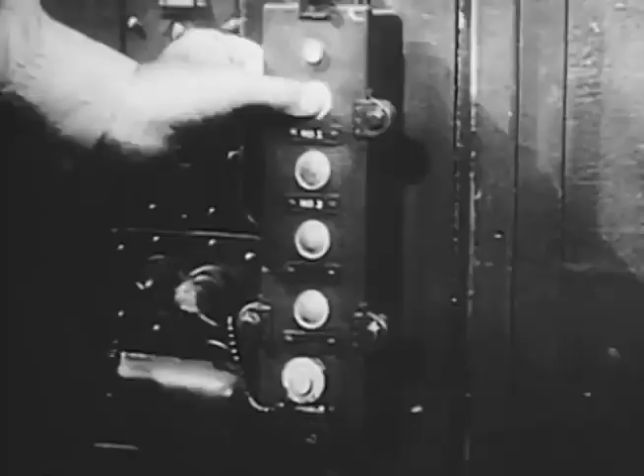Once you had a way to find it, the best bet was to engage the submarine at long range. But guns were only good on the surface, and long-range torpedoes were big, heavy, and not very reliable.

Rockets could get depth bombs out away from the ship. And retro rockets could go after whatever you hunted up with your MAD gear.

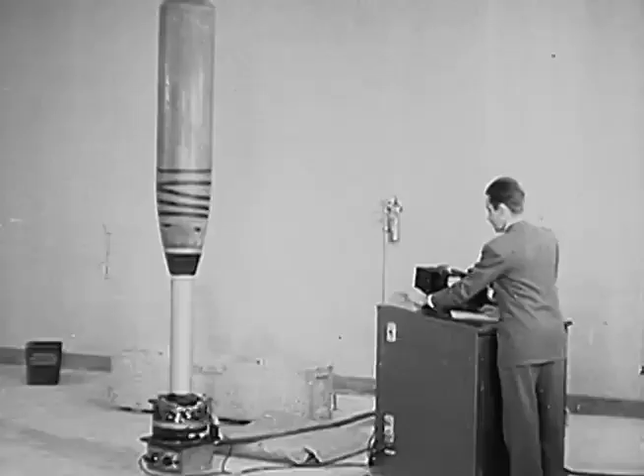The wartime rocket R&D effort that spawned NOTS China Lake wasn't the only secret weapon program being run by Caltech. Right in the middle of Pasadena, and in several spots in the surrounding countryside, Caltech pursued new torpedoes for the Navy, anti-submarine rockets, and everything to go with them.

As the war wound down, and post-war planning pointed toward maintaining a complete West Coast Ordnance R&D establishment, NOTS became a two-site activity, with rockets and air weapons centered at China Lake, and underwater ordnance at the Pasadena Annex, NOTS PA.

Pasadena had Green Street and the Foothill Plant, Morris Dam facilities, and the Eaton Canyon activities that had spawned the China Lake Pilot Plant.

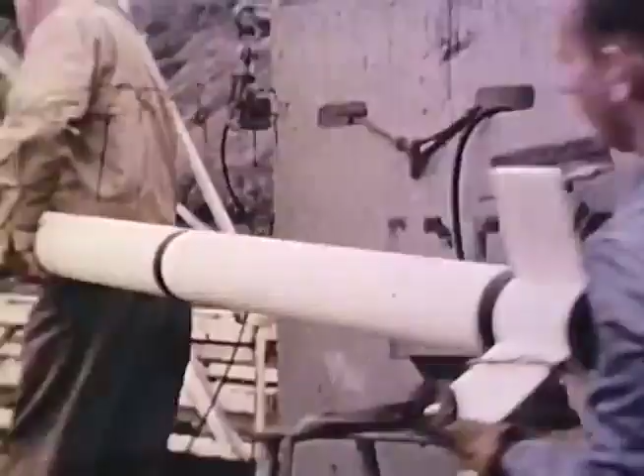Some wartime facilities were closed or returned to civilian use, but NOTS Pasadena would fast grow to include specialized T&E and support facilities at San Clemente Island, San Nicolas Island, and Long Beach, along with strange ranges and strange boats and barges.

For many years known also as P-80, NOTS Pasadena was a unique, complete RDT&E activity in its own right. PA pioneered system simulation and integration, silent, slick torpedo designs, and underwater T&E technologies.

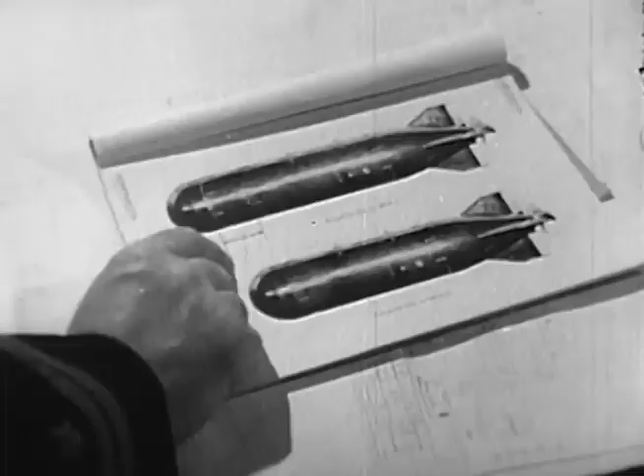Combining NOTS PA's underwater ordnance expertise with the air and surface weapon mastery of the High Desert Rocketeers made for the Navy's premier all-weapon RDT&E activity, with deep sea and arid desert ranges adapted to support the cutting edge of anti-submarine warfare endeavor.

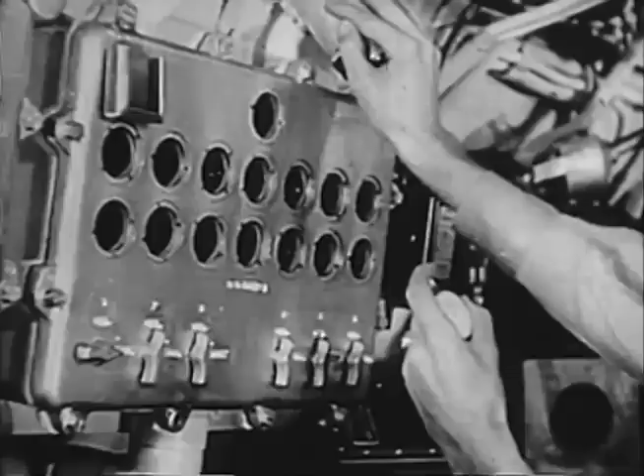As the submarine's offensive potential evolved, anti-submarine warfare, detection and destruction gained ever-increasing priority. And as the direst threat of the lurking submarine evolved from the interdiction of essential supplies to the incineration of entire cities,

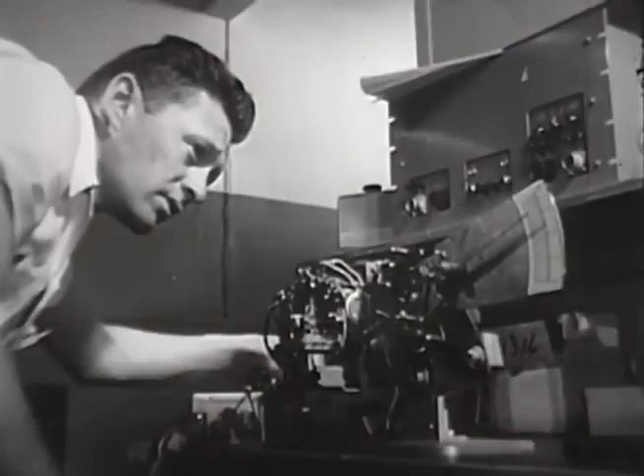anti-submarine warfare gained a prominent place in the Cold War and a high priority in the station's efforts to protect the fleet and the nation.

NOTS concentrated on the lightweight, multi-purpose torpedoes that could be launched from small ships or air-delivered, or rocket-launched to engage an enemy sub well outside its own weapons range.

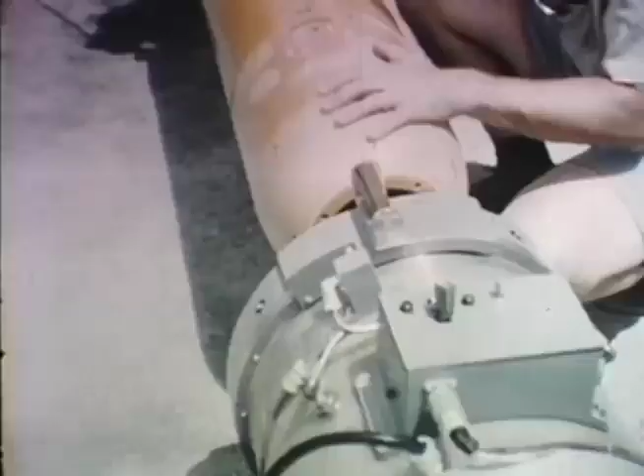Centered at Pasadena, the station's torpedo development program produced the EX-2A, predecessor of the Mark 44, and the surface-launched active acoustic Mark 32.

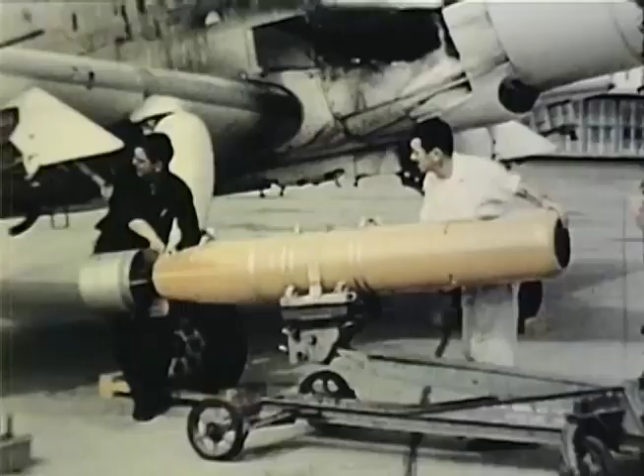NOTS contributed to the Mark 41 and 43 torpedoes, small active acoustic weapons with air and rocket launch capabilities, and to the Mark 44 and Mark 46 systems, advanced medium-range acoustic weapons deliverable from almost any platform, including rockets, helos, and drones.

Along with simulation and survivability studies of the long-range, wire-guided, nuclear-tipped ASTOR.

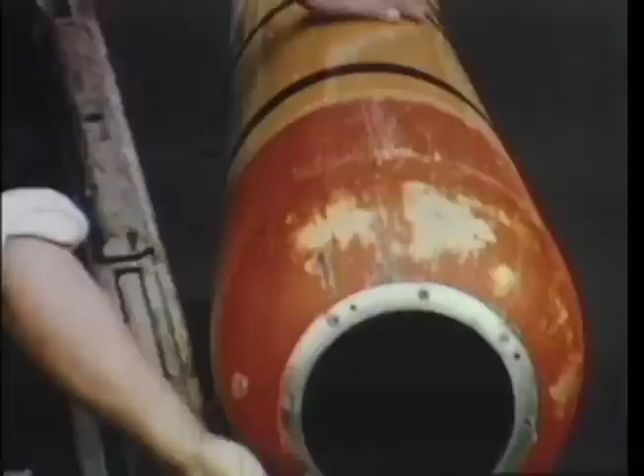With RETORC, NOTS advanced the technology of torpedoes, made them slicker and faster using swish, and made them quieter and more accurate with revel.

NOTS also developed REFIC, a simplified advanced ASW fire control system, and supported Dash, the drone anti-submarine helicopter that entered service in 1963 and returned to China Lake in the 80s as a missile target.

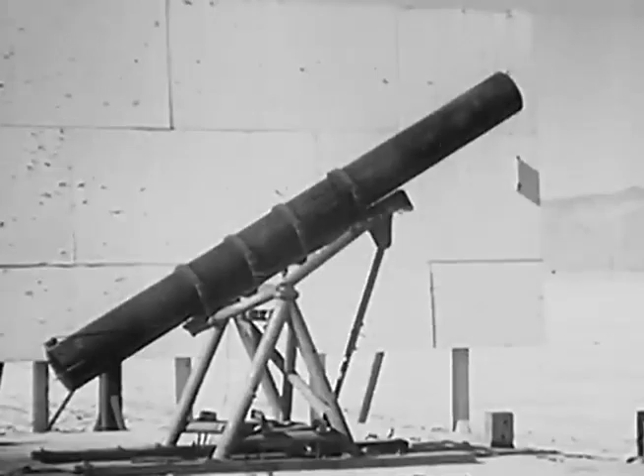By the late 1940s, the station's increasingly sophisticated rocket-fired sub-smashers had outpaced the wartime Hedgehogs and flying milk bottles.

From a new rocket motor and a high-tech fiberglass-cased depth bomb, NOTS made Weapon Able, with its oddly familiar trainable launcher. More advanced was the rocket-assisted torpedo, the Rat, with tag-on launch rails adaptable to most any destroyer.

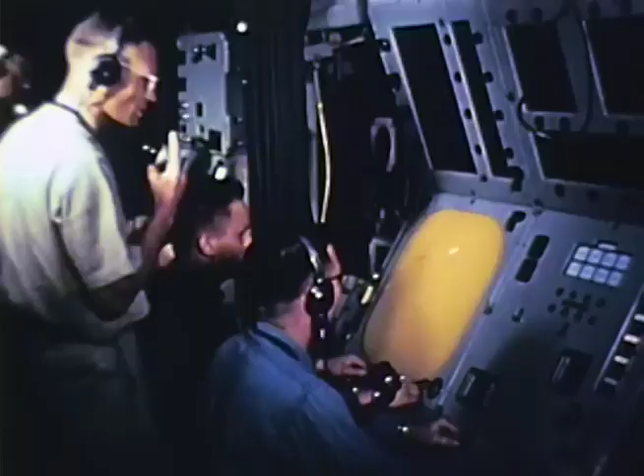Rat quickly gave way to the more sophisticated ASROC, short for anti-submarine rocket. ASROC, with an advanced fire control system, hit the fleet in 1961 in its familiar box launcher, carrying a Mark 44 torpedo.

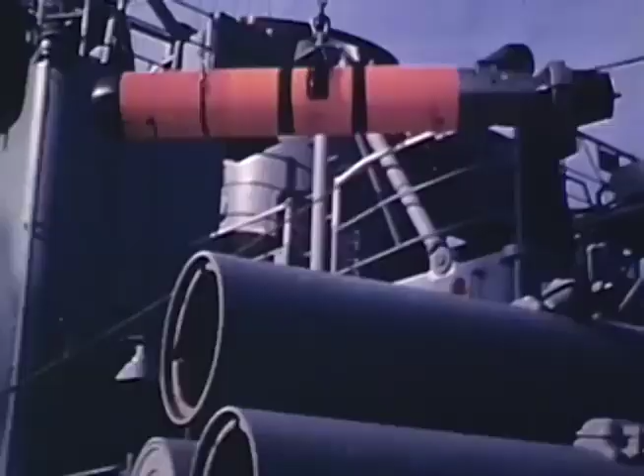Demands for more capability and better range led NOTS to launch ASROC from Terrier rails, upgrade to a Mark 46 torpedo, add a nuclear depth bomb option, and pursue LASROC and ERA, and eventually VLASROC, the vertical launch ASROC. VLA allows for any-aspect launch from long distances to deliver an advanced torpedo.

Some other activities tried a more complicated approach to flying a torpedo, but it's ASROC that's still in the air 50 years on.

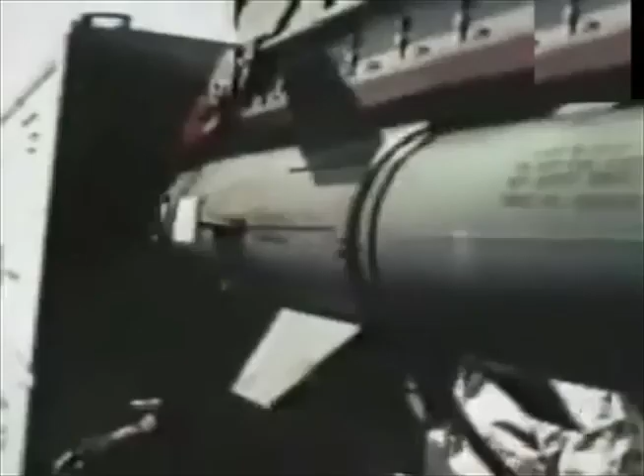Alongside rocket-launched torpedoes and depth bombs, the station pursued families of submarine-killing rockets, air and surface-launched, as well as sub-to-sub. The station participated in the nuclear ASW programs of the era as well, testing and integrating Lulu and Betty, and trainers for those. The sub-launched sub-killer Subroc, testing and improving it with track, air, surface, and subsurface launches. And the atomic option for ASROC, for when a single torpedo just wouldn't do.

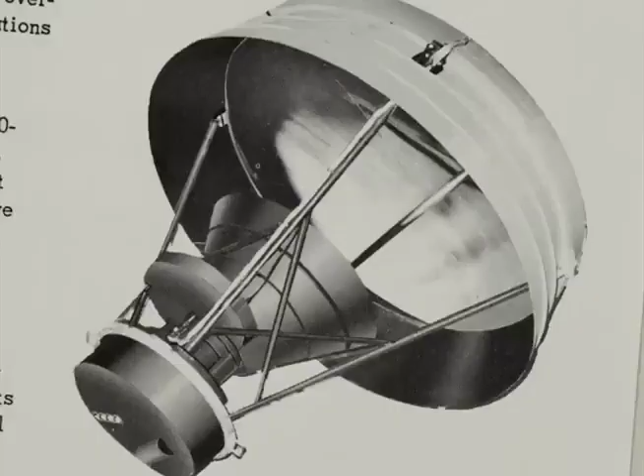RAT and ASROC and Weapon Able are practically common parlance compared to the lesser-known litany of NOTS ASW projects, from ACTAR and ANU and ASTOR, CLASP and Clinker, through DASH and Deep Dunk and Derry, FATUP, Fulham and Hydra, LOSS, PUFS, Moray, and to some extent Rocksight, Sailor Hat, SCAT, SeaHawk, SOSUS, Star, and Stone, not to mention Subad, Subic, Sus, and Swish, and at least one edgy project that evidently needed an Aztec to pronounce.

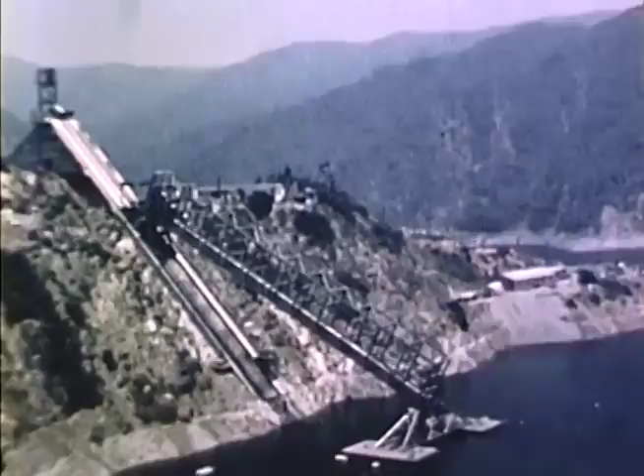There were facilities like VAT and VAL, and the Star Range. CURV, the robot claw machine, was related, although Pop-Up and Pea-Shooter and Fishhook and other Polaris facilities belonged to another episode.

More than the torpedoes, more than the rockets, the station contributed to some very secret aspects of some very public projects, and maintained an active program in fleet ASW data analysis.

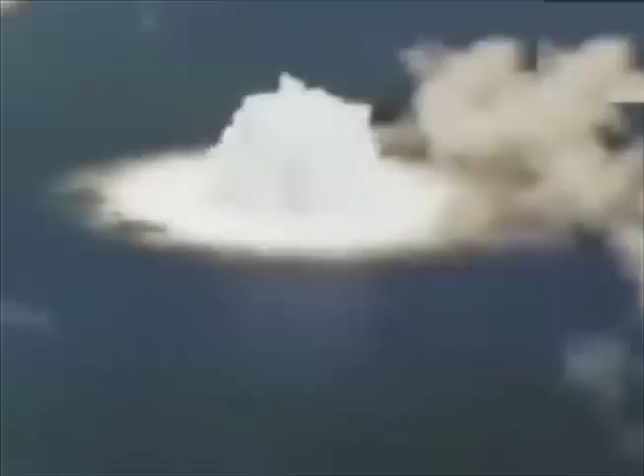China Lake and Pasadena worked on SeaHawk, the advanced ASW ship concept, and participated in the Hydra and Sailor Hat studies to determine the effects of nuclear detonations on ships and aircraft and ASW weapons.

And the station directed the development of SCAT, a hedgehog-delivered noisemaker designed to bell the cat, as it were.

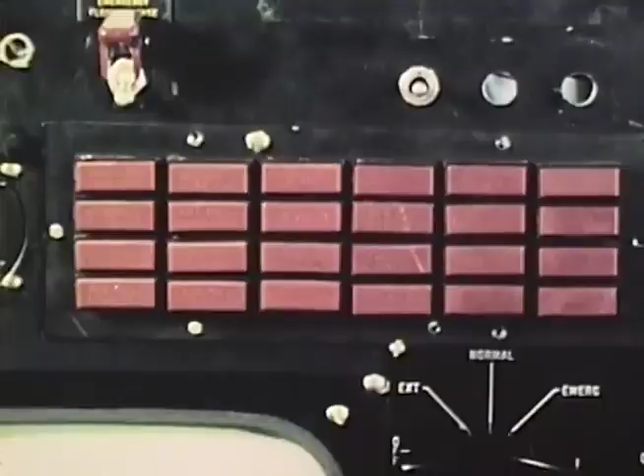China Lake's Moray mini-sub was conceived as a sub-hunting stealth fighter. Although it only saw research use, the concept was well demonstrated.

And NOTS studied the development of undersea facilities that might support sonar picket lines along foreign coasts and serve as bases for those mini-sub fighters.

The technology base for advancing ASW was given high priority too. NOTS scientists and their associates became experts in acoustics and signatures and surface effects and the ways echoes operate.

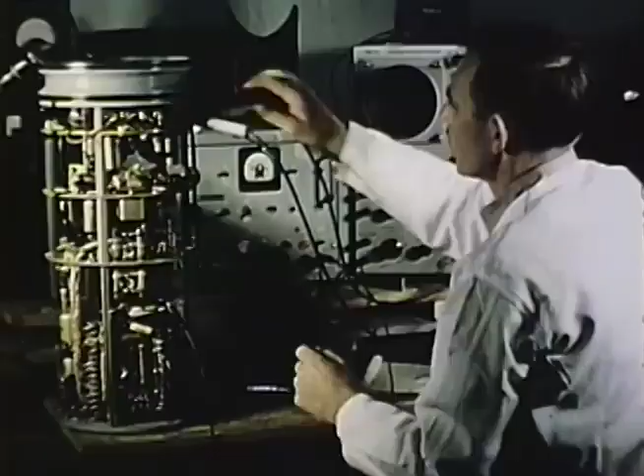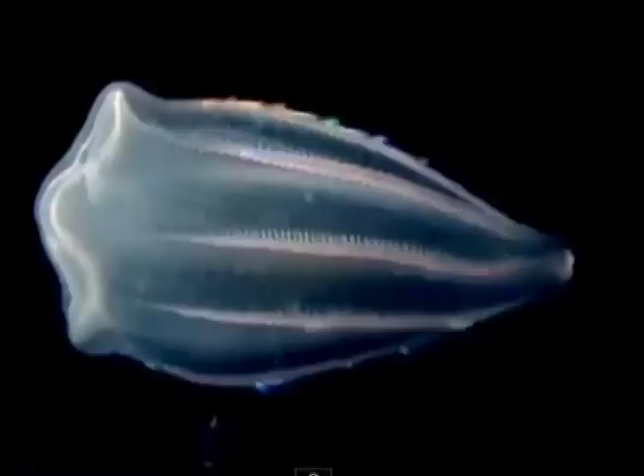They studied silent motors and boundary layer control and the slickness of fish, as well as the very composition of the ocean, and water mass and sound transmissivity and ocean currents and gravity anomalies, and even bioluminescence, to see if the tiny creatures that glow when they're disturbed might show up a sneaking submarine.

NOTS studied and applied submarine hydrodynamics, torpedo hydrodynamics, dolphin hydrodynamics, and magnetohydrodynamics. Yes, even Flipper had potential ASW application.

Although the station was split in 1967, with the Pasadena Annex and the ASW mission going to San Diego as part of what would become NOSC, NOTS had already written several chapters in the Manual of Anti-Submarine Warfare.

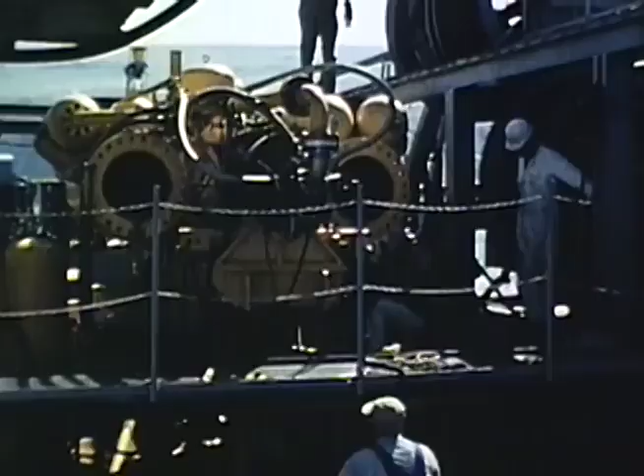And mission purification aside, China Lake would continue to support a variety of ASW systems, like Subroc-cum-Sea Lance, and vertical launch versions of some station standards.

With the end of the Cold War, the submarine would maintain a more subtle deterrent role and continue as a silent protector of the fleet, among other things.

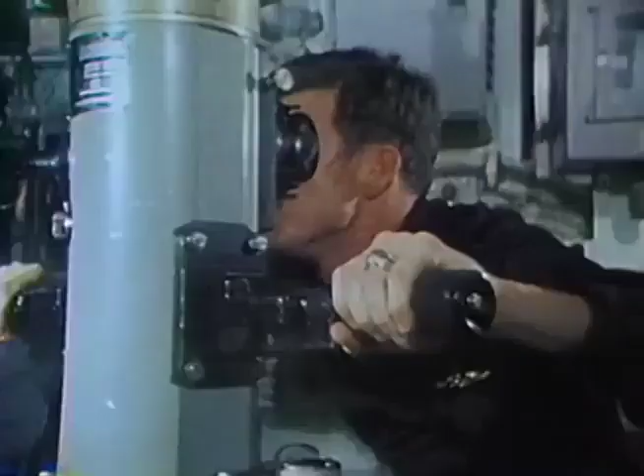But the post-Cold War world has also brought the possibility that even the more primitive of the so-called rogue states might be able to mount a shattering offensive. And in a world where even drug runners have adopted the cast-offs of the Cold War, ASW remains a top priority mission, and the silent, secretive submarine remains a potent player for defense, deception, diplomacy, and deterrence. But that's another story.

In the early years of World War II, Allied shipping suffered heavy losses. In 1942, these losses amounted to over 1,600 ships, almost 8 million tons. Most of these were victims of Axis submarines.

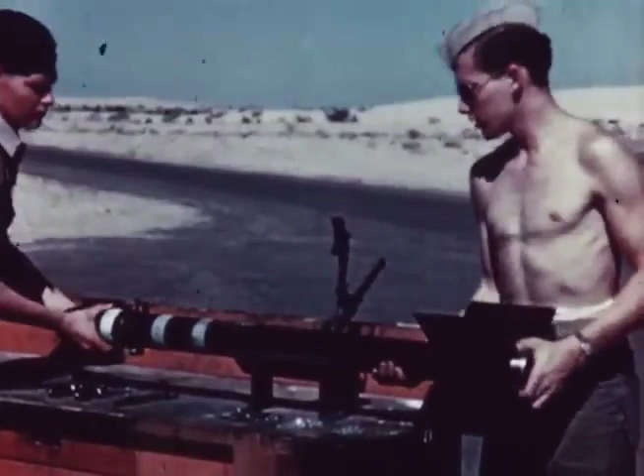One of the first employments of the 3.5-inch forward-firing rocket was aboard the small aircraft carrier Mission Bay in the latter part of 1943.

Lieutenant Habich, the aviation ordnance officer, reported: "The Germans got the picture pretty fast, that they couldn't stay up on the surface, because we didn't have to get so close as we did with the depth charge. It reversed the trend in submarine warfare and gave us an advantage." The rocket served admirably throughout the war as an effective anti-submarine weapon.

In 1943, in the upper Mojave Desert, important construction activity began. Admiral King's order, which had initiated the 3.5 rocket program, also provided the justification for the construction of a much-needed proving ground for aviation ordnance, the U.S. Naval Ordnance Test Station. In subsequent years, this would become the Navy's largest weapon research and development facility, the Naval Weapons Center.

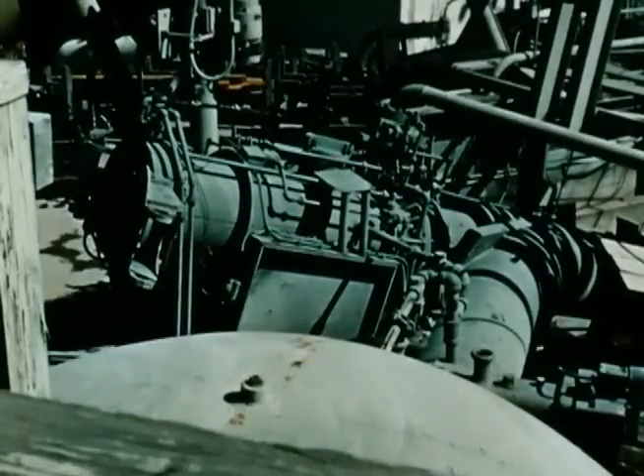During World War II, one of the few facilities available for development work on underwater missiles was the fixed-angle launcher, located at the Morris Dam torpedo ranges. This launcher fired missiles by compressed air and proved valuable in tests of aircraft torpedoes. However, since the water entry angle of a missile affects its underwater performance, the fixed-angle launcher was seriously limited in its use.

Engineers in the newly formed Underwater Ordnance Department realized the need for a new kind of launcher, one which could fire many types of air-to-water missiles from a variety of firing angles at velocities up to supersonic, a facility which could fully document the progress of these missiles from launcher through water entry and underwater travel.

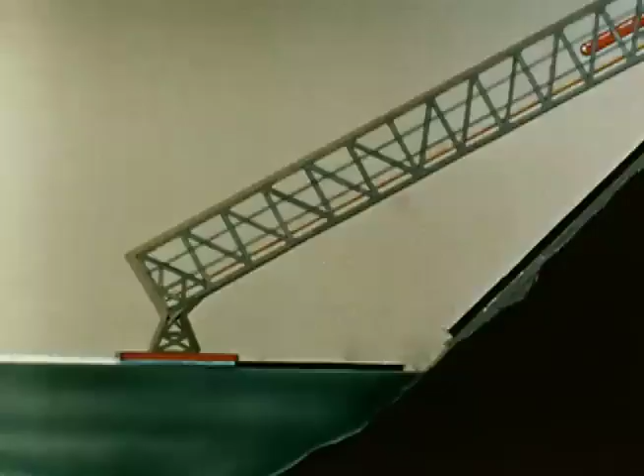The design conceived for the proposed variable angle launcher called for 2 barges to be spanned by a 95-foot bridge, which would support the water end of a launching bridge. The launching bridge was designed for possible installation of as many as 6 300-foot launching tubes, varying in diameter from 12 to 48 inches. The upper end of the bridge would rest on a movable carriage.

On the opposite side of the launching bridge, a counterweight car would balance the launcher and carriage. To adjust the launching angle between 0 and 40 degrees, a motor drive was to be constructed which would act on the 16 2 1/8 inch cables connecting the carriage and counterweight car.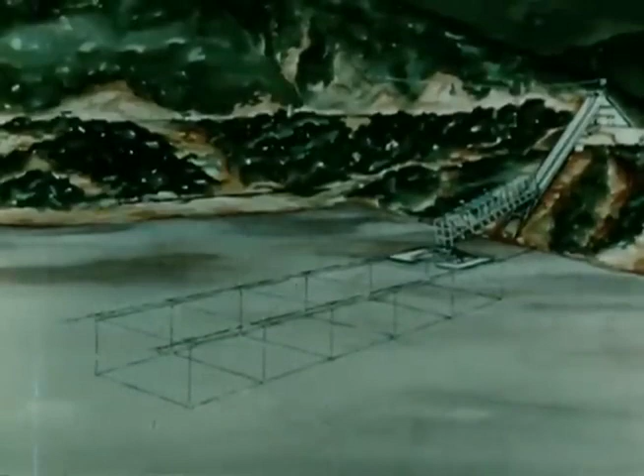Plans also called for a well-instrumented range consisting of 3 general side view cameras placed at intervals parallel to the 1,000-yard range, a movable camera car, 2 rear view cameras, and an overhead camera. In addition, 24 hydrophones, or underwater microphones, would record the missile's underwater travel.

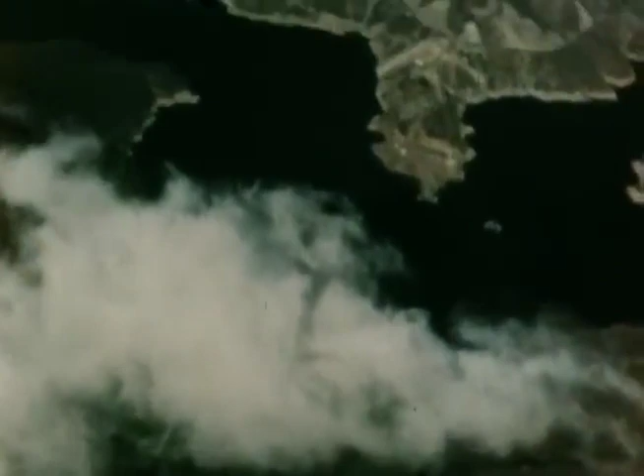Construction of the variable angle launcher was started in early 1946. The launcher site selected was a slope on the south side of the Morris Dam Peninsula, naturally inclined at a 45-degree angle. Clearance of the entire site was rapidly undertaken, and soon the steel-reinforced concrete ramps which would support the launcher carriage on one side and the counterweight car on the other were underway.

Over 40,000 sacks of cement were used in the grouting operation to stabilize the underlying rock, and 2,000 yards of concrete were poured to make the 4-foot-thick launcher slab. While the slab was being prepared, the 35 by 60 by 12-foot special pontoons which would support the water end of the launching bridge were brought in over the winding mountain roads to the dam.

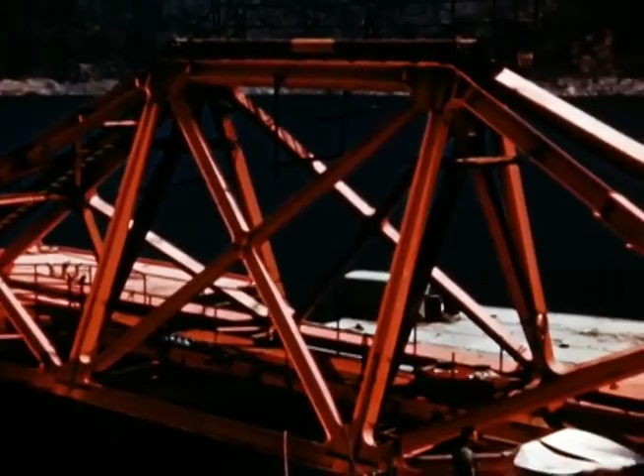Upstream from the launching site, the pontoons were joined by an all-welded connecting bridge which would ultimately support the water end of the launcher. Once the slab was prepared, the rails for the carriage were laid. These rails are about 10 times the weight of standard mainline railroad track, weighing 1,200 pounds per yard.

As construction of the south slope progressed, the opposite slope of the launcher was being prepared. Rails to support the counterweight car were a standard heavy rail section.

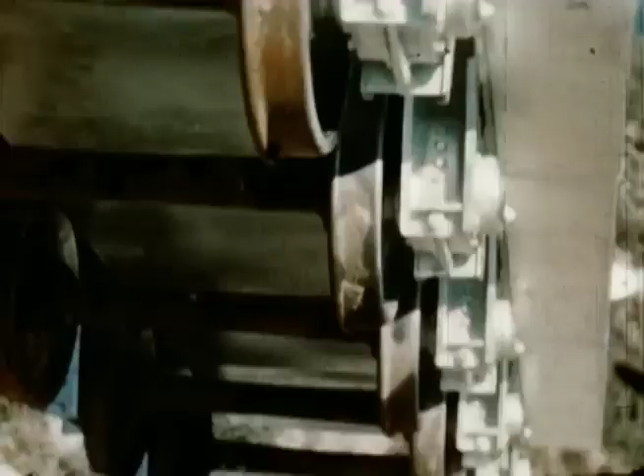The counterweight car, which rides on 10 pair of railroad wheels, was made with a steel frame and reinforced concrete body, acting together structurally as a composite member. Its 500-ton weight was obtained by incorporating steel punchings and other scrap in the concrete in place of rock aggregate, and by filling the car compartments with pig iron.

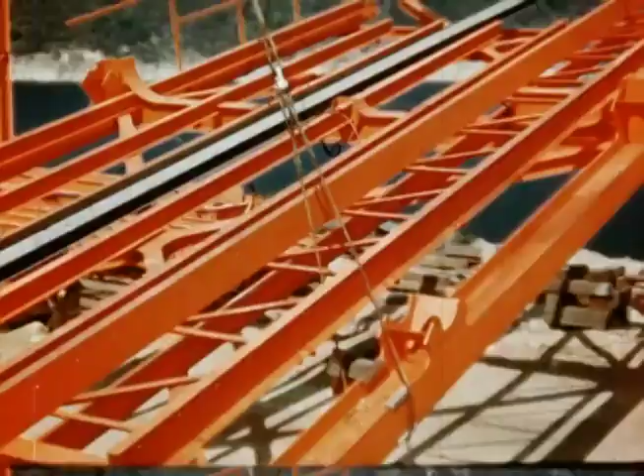One of the biggest jobs to accomplish was the assembly of the 300-foot-long bridge, the longest all-welded bridge ever constructed in the United States. The bridge, the 22.5-inch tube, and the tank to provide high-pressure air for launching missiles were assembled upstream at a convenient level assembly area on the shore of the lake.

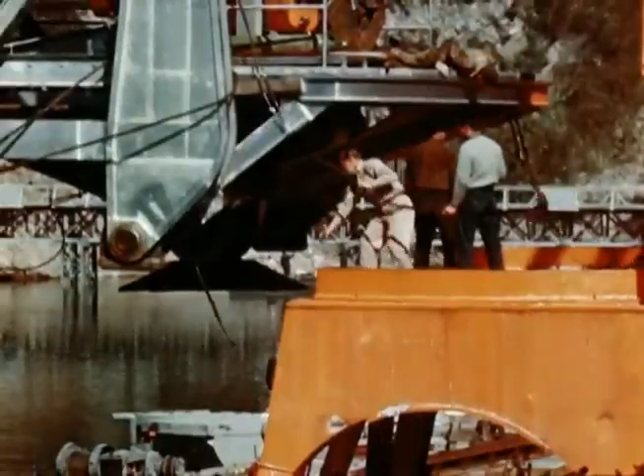The lake level was brought up to transfer the bridge load from the assembly area to the pontoons, and then, supported partially by the pontoons and partially by a barge, the bridge was floated downstream to the launcher site where it was accurately positioned over the carriage. The lake was then lowered until a large pivot pin under the bridge engaged in the carriage.

The launching tube is supported at 25-foot intervals by adjustable turnbuckles, which permit its accurate alignment. Above the slopes and supporting the upper portion of the inclined tracks is a concrete cellular building with 7 floor levels, housing electronic control and recording equipment and other apparatus.

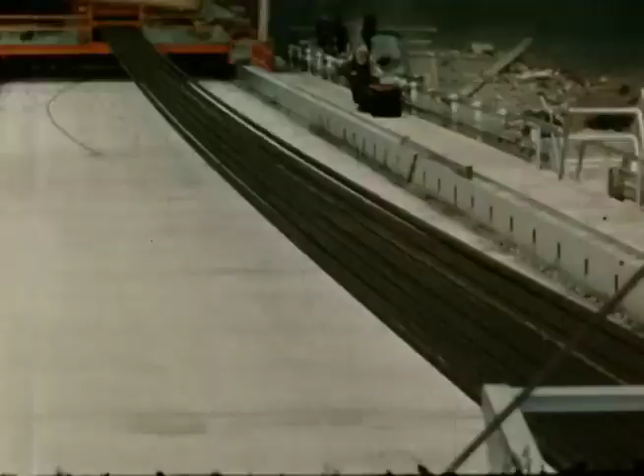To complete the VAL construction, the housing and the main drive machinery were raised to the top of the concrete structure. There, the 16 wire cables were laid over the 3-drum hoist and connected at either end to the launching bridge and the counterweight car.

The variable angle launcher, including auxiliary equipment and instrumentation, was completed in May 1948 at a cost of approximately $2 million. After a brief dedication ceremony, the launcher was christened by a single firing of the torpedo Mark 13 from the 22.5-inch launching tube.

The need for a variable angle launcher had increased during the months of building. Thus, almost immediately following the dedication ceremony, the VAL was put to use.

A typical test usually begins with adjustment of the launching angle. Movement shown here is about 50 times faster than normal. Once the launching angle is set, the work of preparing the instrumentation and the test missile begins.

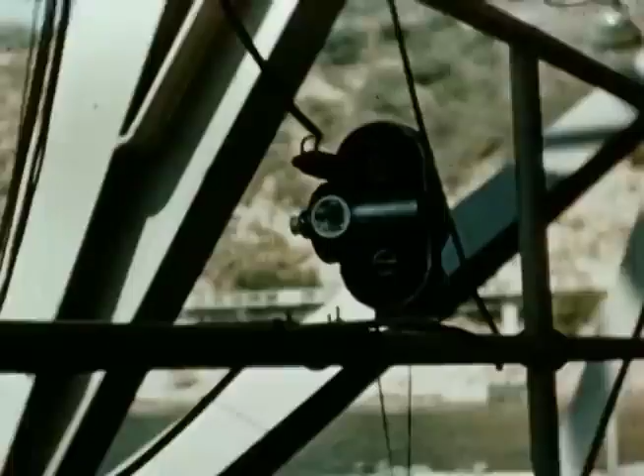Personnel line up the flare and side view cameras in the camera car. The overhead camera is fed out on its cable until it is directly over the water entry point. 3 general side view cameras along the west shore, a general rear view camera atop the concrete structure, and a rear view camera beneath the launcher muzzle give full above water camera coverage.

Meanwhile, the missile to be launched is moved out of the nearby torpedo shop, where it has been loaded with instruments for recording roll, pitch, and yaw of the missile during its run.

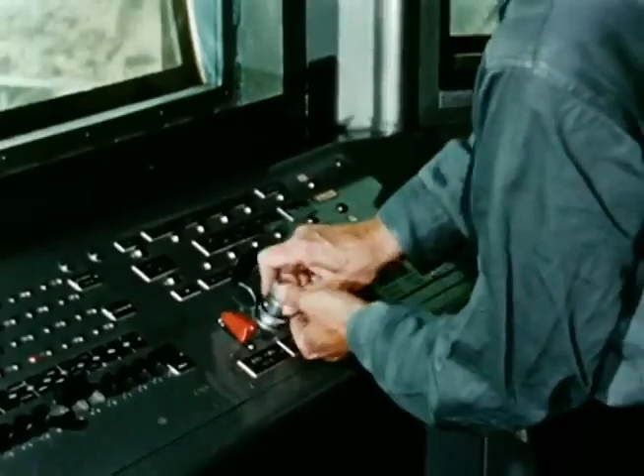The range is clear. The arming plug is inserted. The control operator makes his final checks. 7, 6, 5, 4, 3, 2, 1, fire!

Let's take that again slowly. A tenth of a second after firing, compressed air rushes into the tube behind the torpedo, pushing the missile down the tube as electronic devices measure its velocity and acceleration.

As soon as the missile leaves the tube, its behavior is recorded in many ways. Flares attached to the missile's tail make this pattern on film. Thus, the missile's speed, path, water entry deceleration, and whip can now be calculated.

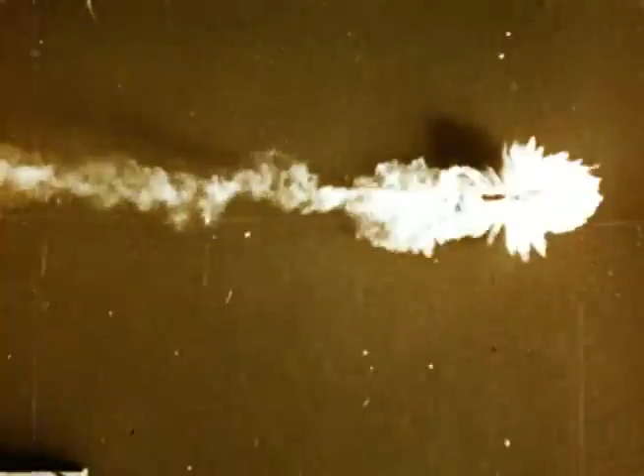These pictures were taken by one of the 3 general side view cameras. This was taken by the water entry side view camera. This by the overhead camera. A picture from the rear view, and one from the tower showing the wake.

A record is even made of underwater travel. By locating the holes in these nets, the first trajectory points are plotted. Those explosions are delay squibs set off in the head of the missile and picked up and amplified by hydrophones. A recording oscillograph in the concrete structure gives accurate data for plotting the missile's underwater path.

Since completion in 1948, about 2,000 launchings have been made from the VAL, some at velocities exceeding 1,000 feet per second. Its versatility has effected great savings in time and cost in the development of torpedoes, rockets, depth charges, bombs, and mines. A tool of research, development, and test, the variable angle launcher and its well-instrumented range has proved its value many times, serving a unique purpose by making possible better underwater weapons for the use of the Navy.

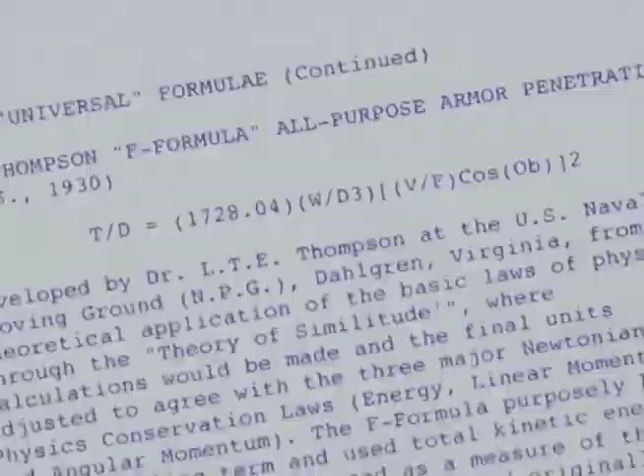He was a collaborator of Robert Goddard, father of American rocketry, and of Deke Parsons and Charlie Lauritsen, influencing the Manhattan Project along with the development of the China Lake Lab.

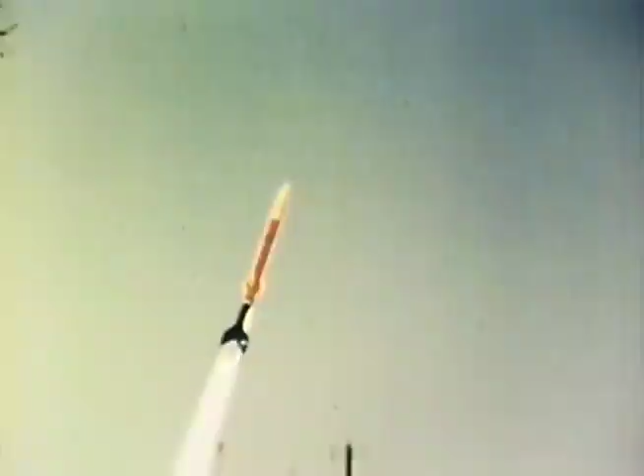Remembered with great respect and great fondness by civilians and military alike, Dr. Tommy's subtle brilliance is at the heart of the China Lake corporate culture, and he set much of the lab's course for decades to come.

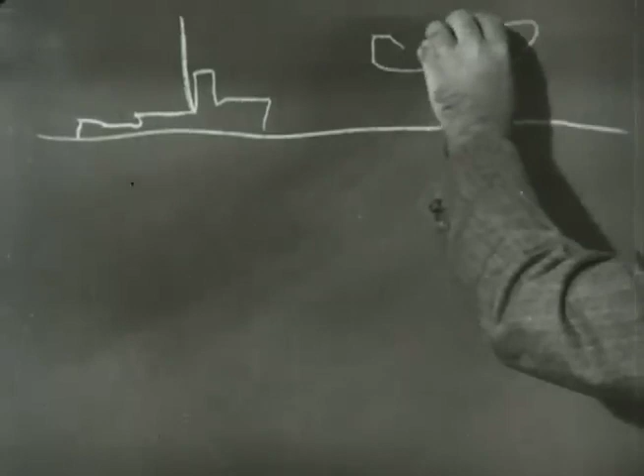Yes, we were learning. We learned that the Mark 32 was an active acoustic torpedo, which could search for and pursue quiet submarines. It was designed to be launched from surface vessels or by aircraft, to attack submarines lying motionless or traveling at speeds up to 12 knots in depths from 60 to 500 feet.

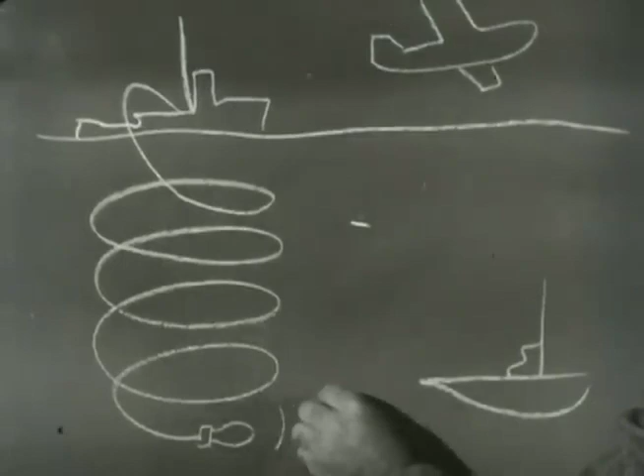When the torpedo enters the water, it sinks to an 18-foot depth before the propulsion motor starts. The torpedo then begins a downward spiral at a fixed dive angle of 3 degrees in a 280-foot circle. The torpedo is constantly transmitting pings in its search for the target. A 600-yard acoustic range enables it to detect a submarine within an area of 36 city blocks.

Here's the target submarine as seen from above. And this is an overhead view of the torpedo radiating pings as it circles downward in search of the target. When echoes are received by the torpedo, it breaks away from its helical search and starts into an arc of a pursuit circle. When echoes are no longer received by the torpedo, it returns to its search circle until it finds the target again. These on-off turns are repeated, leading the torpedo in a weaving path toward the target.

Yes, this is what the Mark 32 Mod-O was supposed to do. But in a coded conversation from Key West, our liaison engineer told a different story, a story of what the torpedo was doing in the evaluation tests at Key West.

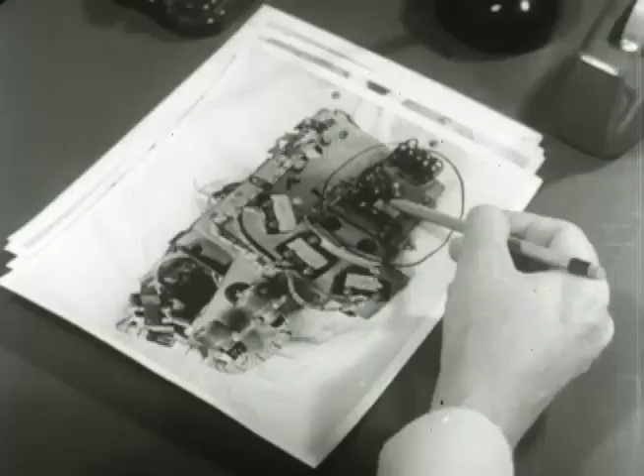When the 32 was air-launched, the shock of water entry frequently damaged the pendulum assembly, deformed the rudder and elevator linkage rods, and broke the motor supports. Furthermore, timing of the programmer was irregular due to a varying battery voltage and slipping cams. And pressure switches were fouled by dirt and salt.

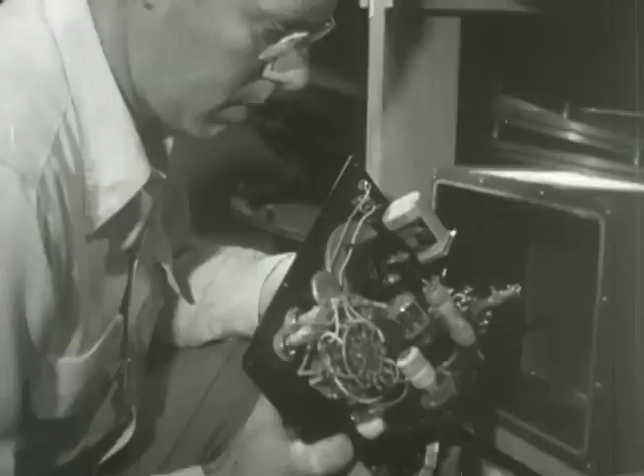Well, there it was. Our liaison man had pinpointed the design weaknesses in the Mod-O. But these were not the only problems. We soon found that equipment for testing and aligning the torpedo was inadequate. The exercise heads were unreliable.

Furthermore, in the 5 years since World War II, many of the torpedo parts which did function properly were no longer being manufactured. And so now, for the first time, we face the reality that the Mod-O, with its component weaknesses, failures, and obsolescence, would not be ready for production engineering until its deficiencies could be corrected.

Pressed by an early completion deadline, NOTS management directed the engineering effort towards improving the performance and reliability of the Mark 32. These improvements marked the beginning of the Mod 1. Meanwhile, Philco, under pressure from the Bureau to get the hardware out the door, tackled the production problems of acceptable Mod-O components until the parts being redesigned by NOTS would be ready.

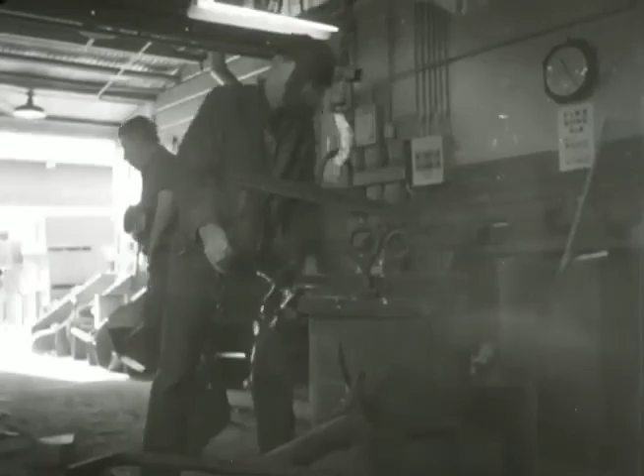At NOTS, redesign went along on schedule. In the weeks to come, hundreds of drawings went into the station shops, to the foundry for castings, then to the machine shops, to the slotter, to the mill, to the drill press, to the lathe. And soon, the designs became parts, and the parts were assembled into components for laboratory testing.

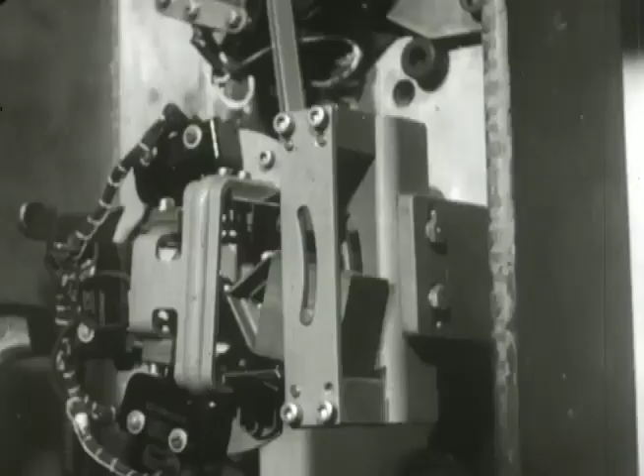Later, in the mechanical evaluation lab, the pendulum was tested on the drop table, a machine which simulates the shock of water entry. Drops like this cause damage to linkage pins. And so, back to the drawing board to limit the swing of the pendulum and test again. And this time, there was no damage from shock.

Then, in the hydrodynamic simulator lab, optimum feedback control of the pendulum circuit was determined. The simulator is invaluable for reproducing torpedo motion during underwater travel.

And then, 60 miles off the coast of California, at the Navy San Clemente Island, the first aircraft launchings of the prototype torpedo were undertaken. Film coverage was provided by cameras installed on the high cliffs. Tests like this helped to prove out the redesign, bringing the Mark 32 closer to completion.

Simultaneous with component testing, putting the 32 on paper became an important part of the program. This mass of technical information was to serve not only as a report to the Bureau and as training aids for new engineers, but also as guides for the manufacturers. To cover the redesign, it took more than 3,000 drawings, several hundred specifications, and dozens of reports.

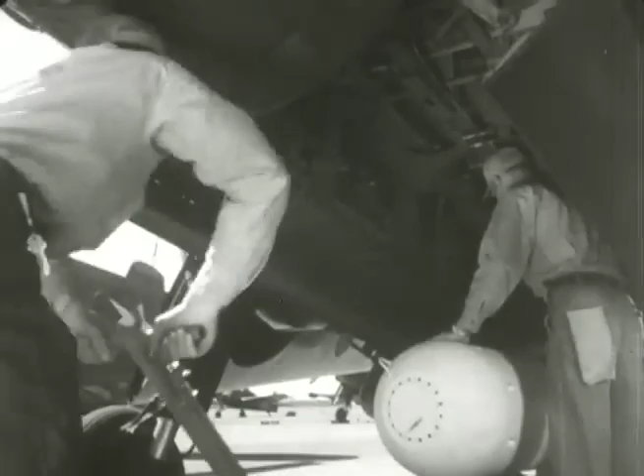These publications showed the progressive phases in the torpedo's development, how the Mark 32 Mod-O became Mod 1, and later Mod 2. The Mark 32 Mod 2 was dropped from many different kinds of aircraft. This F-6F, for instance, carries one torpedo under each wing. Here, the torpedo is being loaded into the bomb bay of a TBM, where steel slings attached to the bomb rack support the torpedo. It can also be launched from blimps.

At the height of the evaluation program, as many as 40 runs a week were made, with about half of these airdrops. Our evaluation and later evaluation by OpDevFor established that the Mark 32 Mod 2 is particularly effective as a weapon of opportunity during the prosecution of a Hedgehog or depth charge attack. The Mark 32 Mod 2, under tactical conditions, has a hit probability of 30% when launched from fixed-wing aircraft and 60% when launched by blimp. And as a surface-launched weapon, it has a hit probability of 50%.

Proved and accepted, the torpedo Mark 32 has been delivered to the fleet, another weapon for the defense of America.

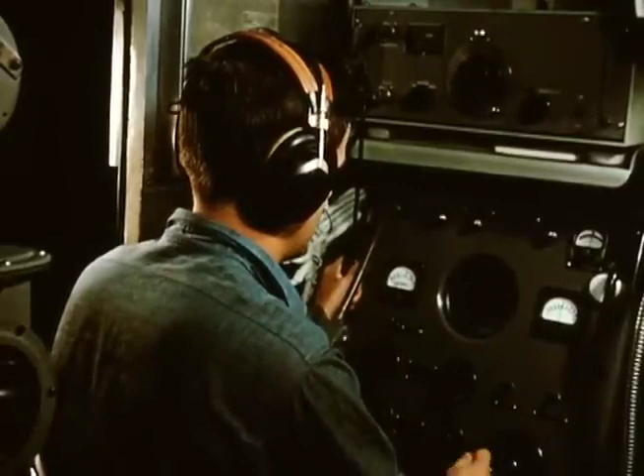Water entry. Somewhere out there, the target submarine is attempting to evade RAT's payload. Below in the target submarine, the sonar operator listens to the on-off attack of the active acoustic torpedo. As he reports the torpedo's bearing, the crew maneuver the sub through an evasive course in an attempt to escape.

Sonar reports the torpedo's closing, and a radical change in course is made. They're taking her deeper to escape, but too late. It's a hit. Raven, this is Lobo. Kilo, kilo, kilo.

Well, that's about how these firings went during our 6 weeks at sea. But with the completion of the Bureau of Ordnance evaluation of the RAT weapon system, it was concluded that it is an effective and workable anti-submarine weapon. When tabulated, the final score showed that of 47 single firings, 40 4/10% were hits.

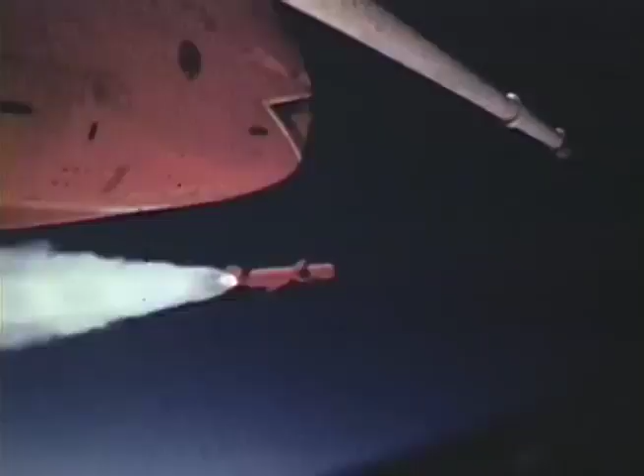The little Skyhawk is in many ways emblematic of the evolution of Navy aviation and of the China Lake Laboratory. Designed early in the jet age and introduced in 1956, the simple, rugged A-4D could fit on the smallest carriers and serve as a one-weapon, one-way atomic bomber. The A-4 became a top-flight tactical asset and a superb smart bomber, taking Shrike and Walleye from range to reality.

China Lake modified its Skyhawks into nosy birds for in-flight missile simulation, built them into test beds for its pioneering ejection seats, mounted them with experimental fire control systems, and dropped, fired, and lofted from them just about anything imaginable.

The display bird is significant itself. The third production aircraft built by Douglas, it was part of the evaluation testing of the original fleet model, and its multiple stores of Snake Eye and Rock Eye, a typical combat load in 1969, are perhaps the best known of China Lake's Eye family of freefalls.

The last production A-4, an A-4M, arrived at Armitage Field in 1980, bedecked with the flags of the Skyhawk's Allied nation users. The simple, reliable analog airplane served right up through the early days of the digital age, as essential in the lab and on the range as it had been in combat.

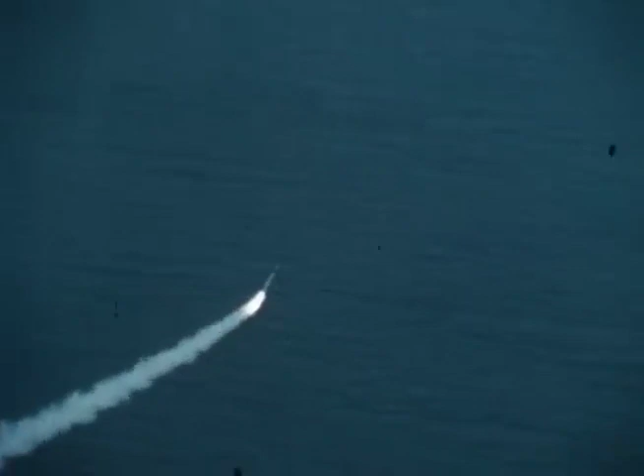Needed was an ASW weapon system capable of detecting, identifying, tracking, and destroying a submerged target submarine, a weapon that could be launched from a standard submarine torpedo tube at tactically useful depths. As of this test firing, the need for such a weapon system was nearing fulfillment. Subrock, a submarine-launched anti-submarine rocket, was in its 5th and final year of development and testing.

The Naval Ordnance Test Station's role in this vital weapon program has been to furnish technical assistance and conduct a series of developmental and evaluation tests at the San Clemente Island Sea Range and the desert facility at China Lake.

In mid-December of 1958, Subrock tests began on the NOTS ground ranges at China Lake with a series of motor separation tests on the supersonic research track, SNORT. Similar high-speed runs were made to evaluate Subrock's inertial guidance package under various acceleration loadings.

Extensive ground ranges at China Lake provide missile flight distances up to 26 miles. Ground-to-ground launchings of Subrock from a Terrier launching system proved out the weapon's ballistics, as well as the boost and total guidance phase.

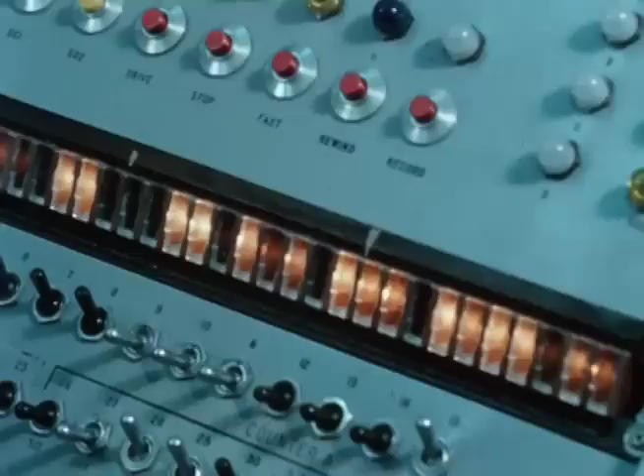Data gathered during each event were quickly reduced and analyzed. Handling the different kinds of Subrock data was simplified by the use of the NOTS-developed data reduction system called NODAC. This system simultaneously converts different kinds of analog data into digital form for use in the IBM Computer 7094.

By early 1960, enough data had been gathered on the land-based tests to begin underwater launch tests of the weapon. In anticipation of this phase of the Subrock test and evaluation program, a test site had been readied at the NOTS San Clemente Island Sea Range.

Few sea ranges in the free world could have provided a more suitable site for these upcoming tests. Steep cliffs provide excellent sites for camera coverage of missile trajectories. Deep waters allow submarine operations close inshore, while shallow water areas with flat, sandy bottoms simplify missile recovery. The climate permits year-round operations.

In preparation for the first phase of underwater testing, NOTS developed a special launching system to fire Subrock from a fixed underwater launcher. Once the umbilical connection was made, the launcher was lowered to the ocean bottom.

The transition to underwater was aided by scuba divers who checked the system for air leaks and ascertained that all cables cleared the LCU.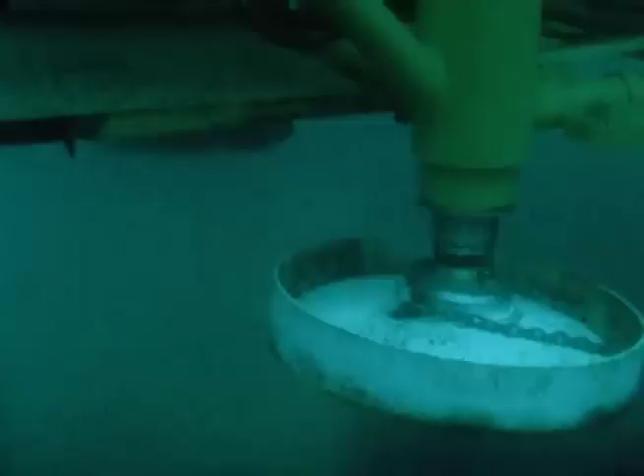The surface of the ocean is an intangible water-air interface without substance or thickness, yet penetrating it has been costly both in manpower and in time. When operational, SUBROC not only would have to emerge from the sea, but effect the transition back into the sea.

In this first test, SUBROC successfully demonstrated its ability to emerge from the sea. As planned, a thrust reversal and separation system was initiated shortly after water exit to terminate the missile's flight.

Now, with numerous successful underwater launchings from the fixed launcher behind it, SUBROC was ready for its final proofing, the launching from a fully manned submerged submarine. With the arrival of the USS Permit at the Long Beach Naval Shipyard, this final phase of the SUBROC technical evaluation program got underway.

Stand by one. Stand by one. Eject orders. Eject.

20, 21, 22, 23, 24, 25, 26, 27, 28, 29, 30, 31, 32, 33.

The first successful launching of the SUBROC weapon from a submerged submarine took place at the San Clemente Island Sea Range on March 28, 1963.

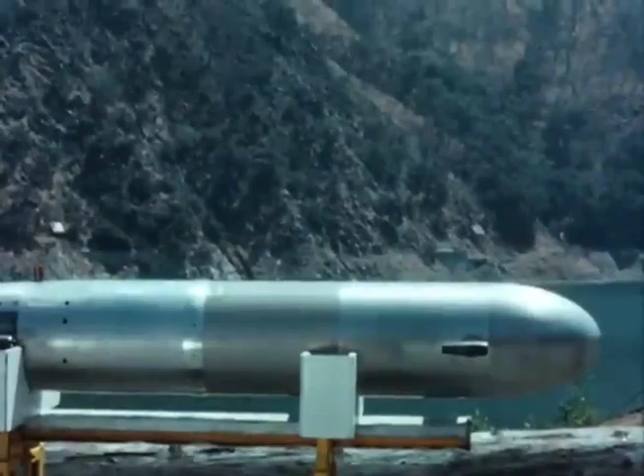The drag of a full-scale torpedo has been reduced 26% by the ejection of additive fluid into the boundary layer. The test vehicle, carrying 4 gallons of pre-mixed additive solution, ejects the fluid at the rate of 1 gallon per second.

Swept back along the skin surface of the fast-moving vehicle, the fluid mixes with the ambient water, causing what appears to be a damping of boundary layer turbulence. Of the more than 25 different additives studied either in a pipe flow or disc facility, the 2 additives found to be most effective in reducing friction are guar gum and polyethylene oxide.

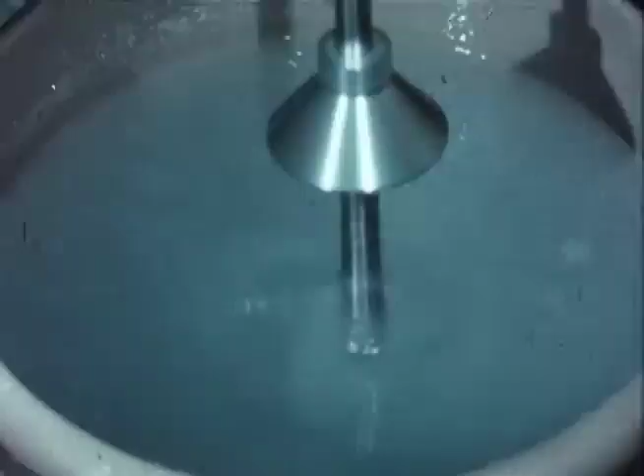Here, a solution of the additive polyethylene oxide is prepared for a cableway test. The additive concentration is 0.2%. The fluid will be ejected from the test vehicle at the rate of 1 gallon per second for 4 seconds. After 20 seconds of run time, when the test vehicle has reached a constant velocity of 55 feet per second, fluid ejection will begin.

The sudden increase in turbine RPM that occurs when the additive fluid is first ejected demonstrates the almost instantaneous reduction in drag. The change in velocity was approximately 10 feet per second. Currently, practical application techniques are under study.

Dolphins have long been credited with unusually high speeds that appear to conflict with known hydrodynamic principles. Accordingly, studies of dolphin locomotion were recently undertaken for the Navy by the Naval Ordnance Test Station, Pasadena. The objective was to establish exact measurements of top speeds, power output, and drag of dolphins, and determine whether dolphins use phenomena that would be of use to the Navy.

In the spring of 1960, the Naval Ordnance Test Station purchased Nottie, a 5-year-old female Pacific white-sided dolphin. Early training for the upcoming hydrodynamic tests consisted of teaching Nottie to coast through hoops in preparation for measuring drag, or retarding force. Other training consisted of wearing a drag collar for measuring power output. Later, in a 315-foot towing tank at Convair in San Diego, Nottie was trained for speed runs.

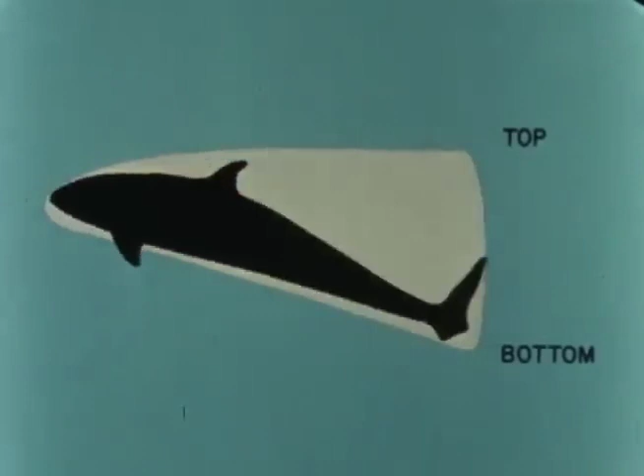Body and tail movements were appreciable during acceleration, but the speed, drag, and power results showed nothing unusual. A reason might be because the Pacific white-sided dolphin is a slow species. Or perhaps no exceptional results were achieved because the tank was too small, or because Nottie had been confined in a small area prior to the tests. Or, for reasons known only to herself, Nottie hadn't really tried to swim at top speed.

Questions like these and others would be explored for answers in future tests with other dolphins under more ocean-like conditions and using different training methods.

A final check of the speed of dolphins was made in the Whalers Cove tank at Sea Life Park, where 2 Pacific spotted dolphins and 4 spinner dolphins were trained to swim at high speeds around a small island. The speeds appeared to be unusually high. Speed data were taken using a camera. The speed was found to be 16 knots after about a 3-second time elapse from the start. Again, nothing hydrodynamically unusual was found.

It is known that dolphins are assisted in locomotion by swimming near a ship or in large waves. This could account for some of the unusual speed reports that have been made. We have learned much about dolphins, and new knowledge will continue to accumulate. But unless new and unusual speed data are obtained using calibrated equipment, it is likely that dolphins exhibit no exceptional hydrodynamic capability.

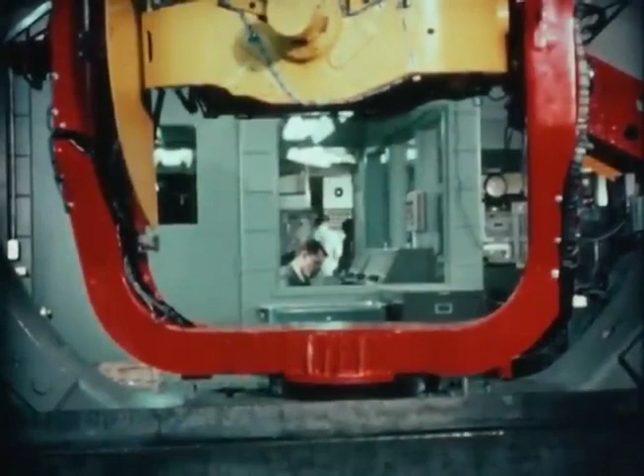Project SeaHawk is an analytical study intended to result in a new class of ASW ship. The project's prime objective is a significant increase in ASW effectiveness. Part of the NOTS Pasadena technical effort in the project is a simulation analysis of the ASW weapon subsystems. The purpose of the analysis is to determine if and how the effectiveness of the weapon subsystem can be increased, what standard should be used to measure the increase, and the magnitude of the increase.

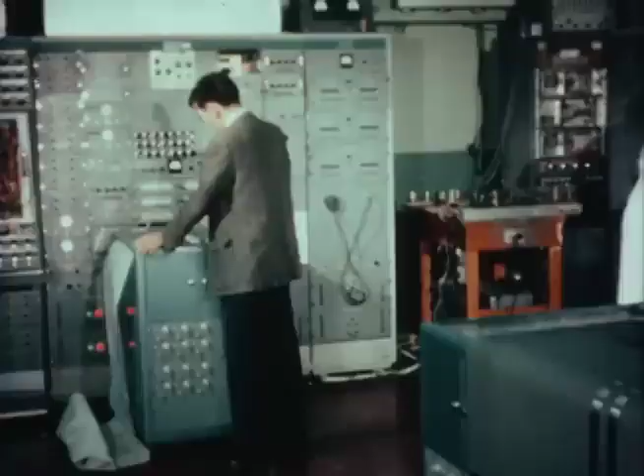An additional aspect of the analysis will be to explore the weapon expenditure rate against false targets and the ship exchange rate, that is, the ratio of SeaHawk ships lost to enemy submarines destroyed—two crucial factors in anti-submarine warfare.

In utilizing simulation techniques, computers in effect become own ship, the target submarines, the environment, and the ASW weapon subsystems. To determine the various systems' limitations when coping with more than one target, two target submarines having dynamic and acoustic characteristics similar to the Skipjack and the Thresher will be used. Environment limitations such as ray path distortions due to refraction, ocean bottom, and sea state will be built in.

When completed, the ASW weapon subsystem simulation analysis will aid in defining the requirements of the components necessary to achieve an increase in effectiveness, and provide a quantitative estimate of the increased kill probability of a weapon subsystem using the components.

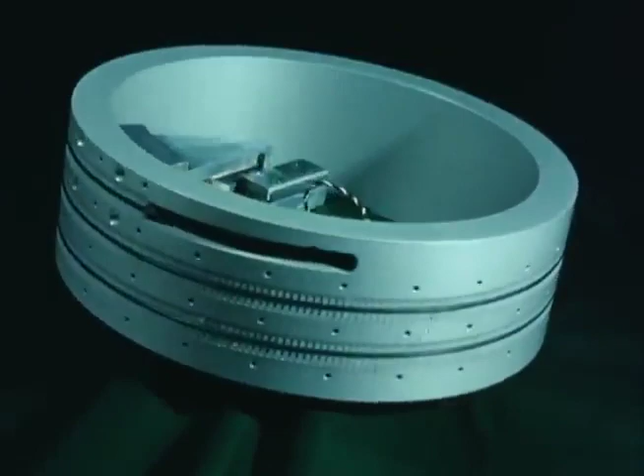High-speed, deep-diving submarine targets impose severe performance requirements on conventional torpedo detection systems. To improve the torpedo's capabilities to detect and classify the advanced submarine, ultra-high-speed data processing techniques need to be applied. Correlation detection is an application of such a technique. Targets are located and classified by continuously comparing in minute detail the received signal with a coded signal that was transmitted. A parallel magnetostrictive delay line correlator called the White House correlator, under development at NOTS, permits the required millions of calculations per second to be performed within the severe space and weight limitations imposed on a torpedo homing panel.

The experimental work required to develop and optimize the homing system is being accomplished by the use of data digitally recorded at sea. Transducers mounted on a movable platform are lowered to depths up to 600 feet.

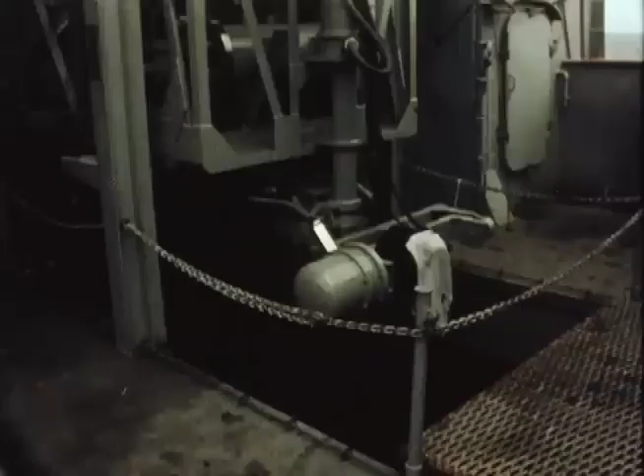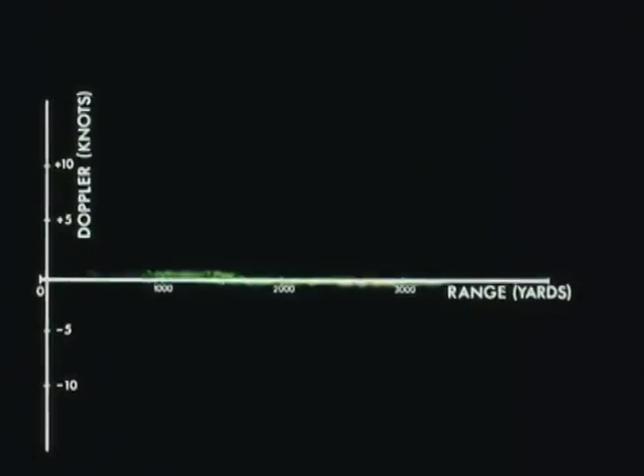Echoes from different classes of submarines operating under a variety of conditions are recorded on tape by electronic equipment housed in a portable van. This high-speed oscilloscope presentation of a run of the submarine USS Permit illustrates the progress being made. The graph superimposed over the presentation permits determination of both target velocity and range. The USS Permit, operating at periscope depth, is approaching